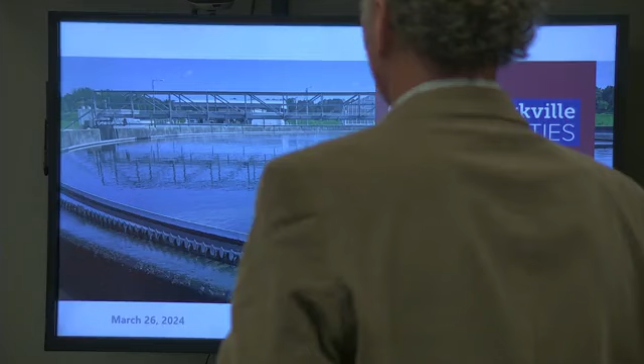That's kind of what today is about, to give the board a snapshot of where we are. And I think the next thing we want to talk about, not today but in the days ahead, is how do we actually implement these things? How do we pay for them? What is the sequence and timeline of doing that? And then how do we fund it?

That even gets back to part of our conversation in the works in the special call meeting, and we will be trying to pursue any and all types of funding sources available, either matches, grant matches, low interest loans, which will be on the next board agenda for Tuesday night, pursuing that. And then obviously the conversation too, probably sometime this summer or the fall.

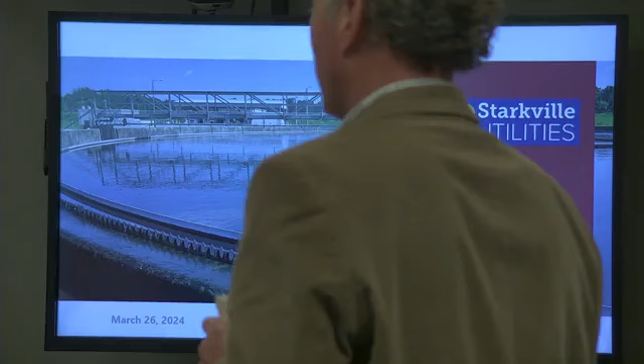But today is really kind of a snapshot of where we are, kind of where we need to be from a community standpoint, both currently and then also projecting out 20 years. That was kind of the focus of this evaluation, because we certainly do not want wastewater to be a limiting growth inhibitor for our community.

I'm pleased today to introduce to y'all Wes Cardwell. I know Wes has never presented before the board. Wes is the project lead for this, as well as the project lead for our aeration design. And then he's joined here by Mr. Matt Tabor, right over here. They both are in the wastewater division of Garver. We're really happy with the project we're working together. I'm going to turn it over to Wes and let him go through it.

But today is very much please stop along the way. We tried to distill this down into a very big document that you guys all have a copy of, into something that is just the pertinent information, but also giving you some understanding of what a wastewater treatment process looks like, so you can kind of understand some of the challenges.

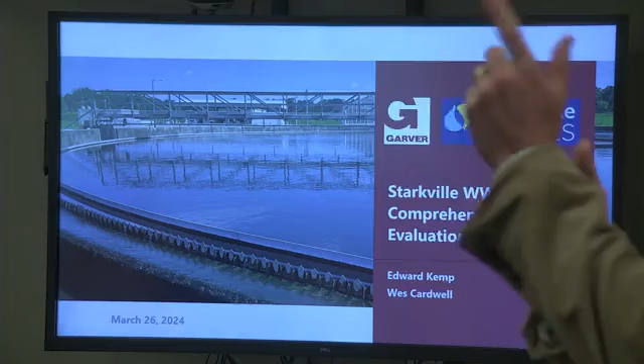So, Edward, before you go, would you refresh everyone's memory about who your team is here with us? I'm pleased to have several members of my team here. Mr. Thomas Ware, our chief wastewater operator, is the gentleman who keeps everything running on a day-to-day basis with staff, and some of the challenges you'll hear about today. He does a magnificent job keeping us within our permit compliance, and I just want to thank him.

And of course, Mr. John Scott, our assistant general manager. John is an electric guy by trade, but he is learning more and more about water and wastewater as he's been in our multi-service utility, and I'm glad that he's here.

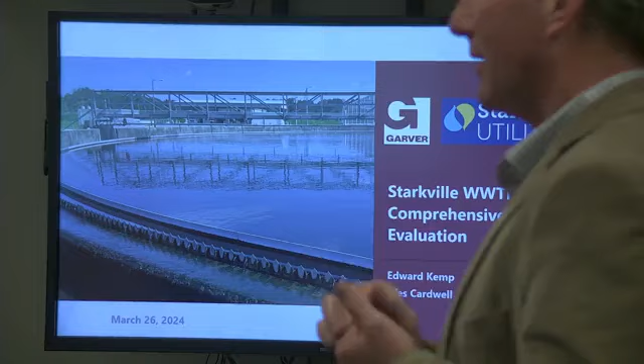Mary Williams is our capital project manager. Mary has been working on this project from the beginning, helping draft all the RFP documents all the way through. I call Mary the cat herder for this project, making sure we're staying on schedule and that everybody got comments in, and that we're progressing on the timeline we all agreed to. Mary's obviously going to be instrumental going forward in how we actually implement and build these projects and recommendations. And then Bailey Wofford is our system engineer for water and wastewater.

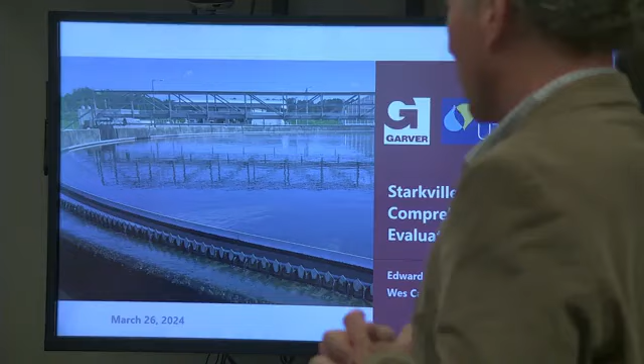And so we got a great team, and thankful for them and their work on this project. So thank you, Mayor. Thank you.

We'll turn it over to Wes. Thank you all, and good morning. First of all, thank you for the opportunity to share. I always love talking wastewater, and getting to tell a little bit about it is fascinating. When we do these comprehensive evaluations, it makes me very weird—I love it, it's just fun, because every plant has a story to tell, every utility has a story, every piece of infrastructure has a story to tell. So we appreciate the opportunity to learn y'all's story, and more importantly, to share that story with y'all this morning.

And what the plant holds as it sits today. So a little bit of background, just to refresh everybody's memory on the facility. The Ernest E. Jones Wastewater Treatment Plant has reliably served the city of Starkville and surrounding areas for over 45 years. And just like any other wastewater treatment facility, it's a lot of times out of sight, out of mind type infrastructure that we don't think about. Usually when you go there, they're not the best smelling facilities.

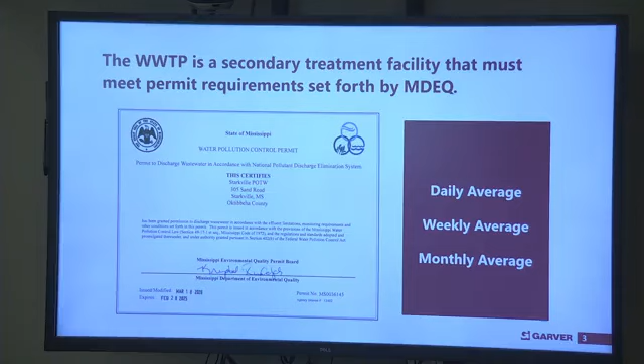It's important to understand the facility today and its capabilities to treat, but we don't want to be short-sighted and ignore what's coming down the road. We don't want to just stop short of equipping you today—it's always about that story tomorrow and the ability to do that tomorrow. So that was a key part of this evaluation.

Interestingly, since commissioning, the facility has met the needs of Starkville to support growth. Wastewater treatment is a core piece of that growth model. If you look at the population of Starkville since the facility came online in 1980, it was just a little over 16,000, and over the 45 years since—these numbers are probably a bit outdated—it's just shy of 25,000. That facility has been a backbone; it's supported that growth, it's gotten you to where you are today. That's important, just like all the pieces of our infrastructure are—if you don't have that piece of the puzzle, it's going to make life difficult.

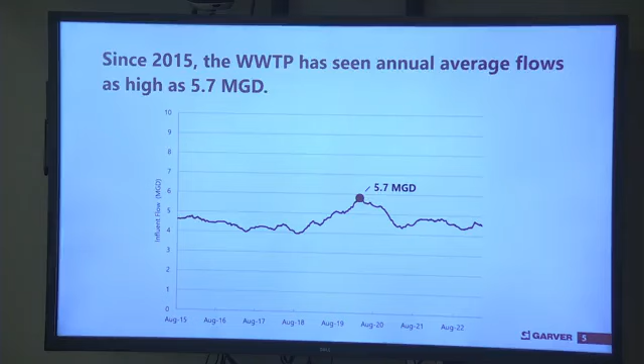Since 2015, just to paint a snapshot, the wastewater treatment plant has seen, annual average flows as high as 5.7 MGD. They spiked in 2019 and 2020—that was a very wet part of the five-year period that really pushed those numbers up and certainly strained the facility. But you can see a rolling average of somewhere around 4.7 to 4.8 MGD. That's important because the original design capacity of the plant, when it came online in 1980, was 5 MGD—that's what it was designed to treat. Now, we've learned a lot in wastewater since 1980, where we're able to push these facilities a bit more than they were designed for. But as it relates to the facility today, and the flows it sees, it's at its limit. They're doing everything they can to keep it going and keep the facility in compliance.

With anticipated growth, Starkville is going to continue to grow, and the plant's going to continue to be challenged to maintain permit compliance. Just some high-level projections from this effort: that roughly 4.5 to 4.75 MGD we've seen over the past 5 years, 20 years from now we'd expect that to be 6.5 to 7 MGD. That's simply the growth of Starkville and any additional connections the city and utility takes on.

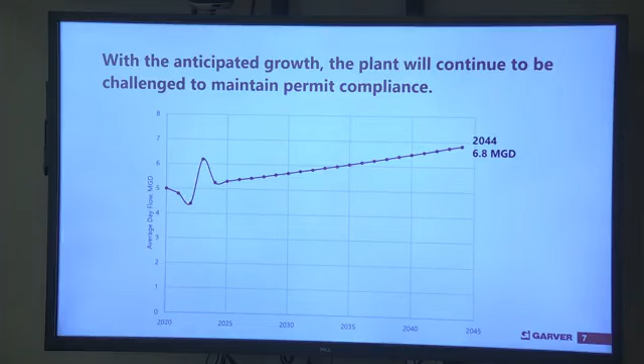So last year, in 2023, Starkville Utilities initiated a comprehensive evaluation of the facility. Evaluations can mean a lot of different things. Specifically for this facility, we were looking at capacity. We needed to understand what that number was, what this facility can treat. We needed to understand the condition of the assets there—are the key pieces of the plant in good condition, or should we be aware of them retiring very soon?

And then reliability. Reliability is a very important piece of anything to do with infrastructure, but certainly wastewater treatment. We need the facility to be reliable when it's pushed to its limits or when a piece of equipment goes down. How equipped is this facility to respond and ultimately maintain compliance with the permit, which is the number one charge, along with the safety of the personnel. I always like to view this as a three-pronged stool, because ultimately all of these contribute to plant performance and compliance.

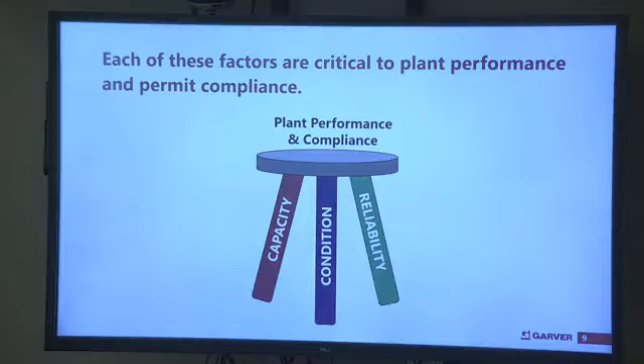So a few things we want to check off the list today: give you a background of the facility, talk about the results—I think that's of most interest to everybody in the room—what's the condition assessment results and what's the capacity assessment results. They're two different things we'll talk about. Some recommended improvements to address the findings from that assessment, and then some conclusions, path forward thoughts, and hopefully a lot of conversation and discussion.

As we go through this, please feel free to stop me. I'll be glad to go into any of the details related to the evaluation that may or may not be covered here. So please feel free to do that.

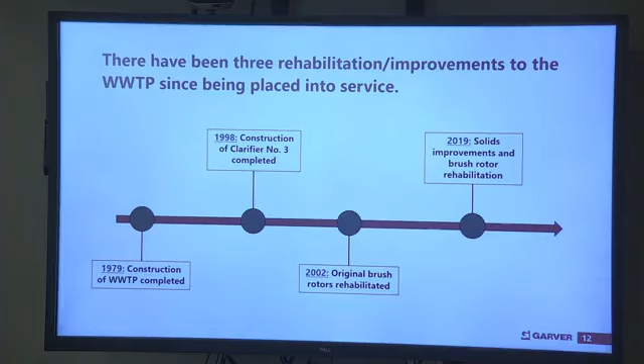So I mentioned before the facility came online in 1979, 1980, and by and large it's relatively untouched. In 1998, an additional clarifier was constructed that did not increase capacity, but gave Thomas and his team another tool to help with treatment, performance, and reliability. In 2002, the original brush rotors were rehabbed. And then, probably most of us are familiar, in 2019 the solids improvements project was completed, along with some upgrades to those brush rotors, which are a key focus today.

So when we're talking about wastewater treatment, I always try to start from here—not to go into the minutia of all the processes, but I want you to understand that wastewater treatment is a series of steps. We're slowly chipping away at the mountain, so to speak, to achieve permit compliance. These steps have to operate effectively to meet those permit limits. So if step A is not operating well, or it's sacrificing its ability to treat, steps B, C, D, and E are going to suffer. The further upstream you go in a facility, the poorer that performance, and it's going to snowball as it works its way through. So we have to understand that when we talk about each of the various processes, because they're all designed and aimed to do one specific thing that ultimately contributes to permit compliance.

So just to walk you through the flow path here at the plant: there's an influent pump station to the northeast. If you're familiar with this area, there's a very large EQ pond up there. All of the wastewater in Starkville goes to a pump station right there, which pumps it into our very first treatment step. You see in the red box, that's our headworks facility.

We're trying to remove any debris, trash, rags, or small grit particles that may affect equipment downstream. That's what we're trying to achieve in that process.

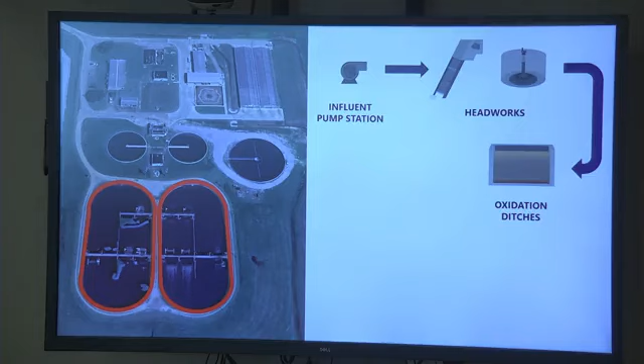From there, it goes to our oxidation ditches. Wastewater treatment is a biological process. We rely on biology. It's really cool if you get into the weeds of it to see what these microorganisms are doing and how it leads to compliance and treatment. It's not magic, but it kind of looks that way under a microscope. That's an active biological environment in our oxidation ditches contributing to treatment, removing a lot of the organics and ammonia we're trying to remove.

From there, we go to our secondary clarifiers, and ultimately we're trying to settle out all of those bugs in the bottom and create a clear layer on top, and that clear layer is what flows downstream. We'll talk about the bugs in just a second.

From that, we still have to disinfect it. Secondary treatment standards, when the Clean Water Act came along, one key initiative was disinfection - removing pathogens, those disease-causing organisms that our biological systems treat but don't get down to levels that protect public health. So here at this facility, chlorine gas is used to inactivate and oxidize those pathogens. Then we re-aerate it, adding oxygen back to the water so the fish are happy downstream.

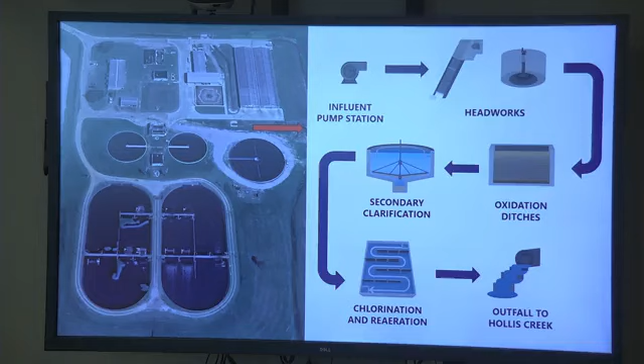We discharge it ultimately into Hollis Creek, which is just to the immediate right on this aerial photograph.

I mentioned the bugs. We do produce biology as part of this process, and because we're producing biology, at times we get more than we need, so we have to waste solids as part of this. From our secondary clarifiers, we have a sludge holding tank, one of the new facilities you have there. We dewater those solids so we can ultimately dispose of that.

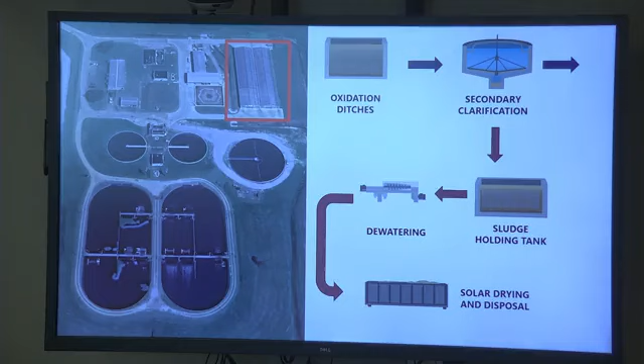At this facility, you have solar drying to achieve a certain quality biosolid that enables more disposal options - it's a very nice thing to have. But ultimately, that is how we get the solids out of the facility. So a lot of different pieces of the puzzle coming together, but each very important to that mission we talked about.

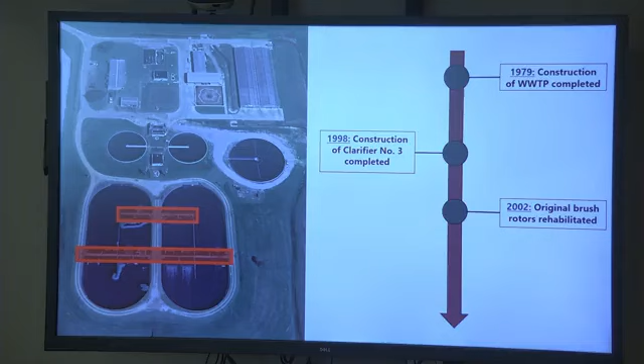In 1998, clarifier number 3, highlighted in yellow, was constructed. In 2002, we addressed some of the equipment in the ditches - you can see that highlighted in red. And then in 2019, everything in the upper right we addressed, as well as going back and revisiting the condition and replacing the rotors in the ditches as part of that effort.

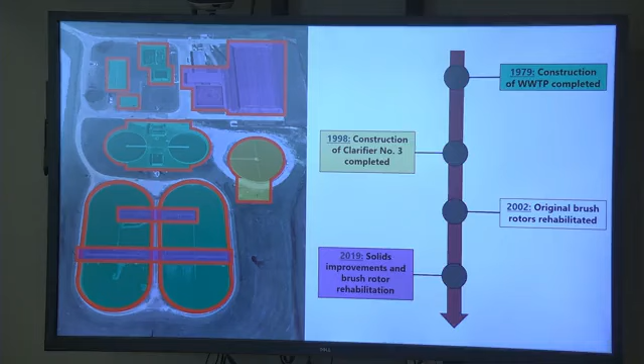If we put everything together, you can get a feel for a lot of the major components. The major pieces of the puzzle are in green in this image, meaning they're that 45-year-old asset working well and reliably, contributing to treatment. But these things have a finite life that we'll talk about - it's important to understand that so you're not caught off guard or surprised should it go down.

As part of this evaluation, we assess the major equipment for each unit process, each of those steps along the way, from two different angles. The first is to understand the condition - what's the state of this pump or this basin - and then to understand the capacity. I want to break both of these down further as we go through these next few slides, but we'll start with this piece.

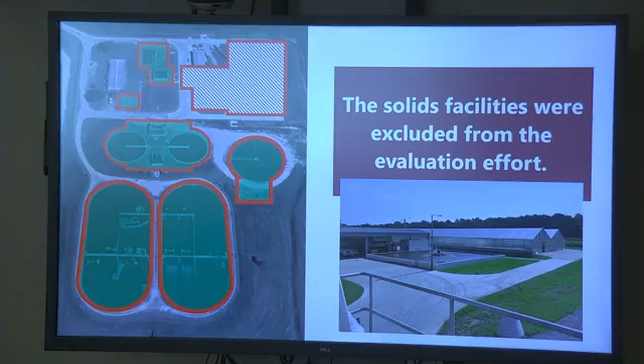Before that though, we did exclude the solids facilities from the evaluation effort. Again, those were most recently placed online in 2019, and those facilities are working well for Thomas and his staff. So to really pinpoint and get a laser focus on the facilities that needed it, those were excluded from the effort. But that doesn't diminish their importance to what this facility does - it's an extremely important piece, just not part of the evaluation assessment that we did.

So condition - when we look at wastewater treatment facilities and treatment facilities at large, we really want to understand the condition of an asset from three different angles.

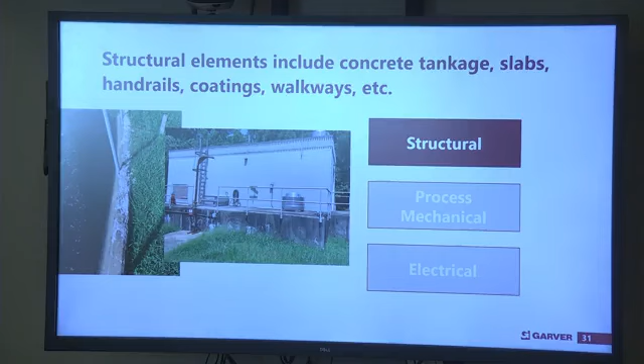One, the structural elements of it. What does the concrete look like? How are the handrails, the condition of those, so that our workers and our staff have a safe environment to work in? Any protective coating systems, the walkways, anything that you think is structural, we look at it from a structural perspective. And those are important to understand as a part of a facility.

Process mechanical, this is the pumps, this is the valves, this is the pipes, this is the working equipment, understanding the condition of those assets as it relates to their condition.

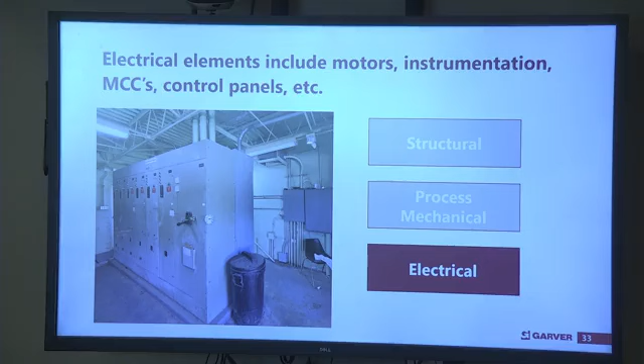And then lastly, we can't forget electrical. Electrical is really the bones behind the scenes that's powering these facilities. And really we talk about reliability and worker safety. This is a very important aspect that we have to consider because this is dangerous stuff. It's not just that little socket in the wall that you may get a little shock from. This is serious power that can cause death if these aren't in good shape. So we have to understand that as well.

When we do these though, I always try to set the stage. I try to have conversations with each of the various utilities that we do this at, because condition assessments, just by their very nature, are subjective, right? You're asking somebody to come in to look at a piece of equipment and tell you how well it is or how poor it is. That's extremely subjective. I'm not dismissing that, I'm cognizant of that. And they're sometimes difficult to translate into actionable plans. And there's reasons for that, because we all have a bias when we're looking at pieces of equipment.

So I always try to, when I visit with my team, when I visit with utilities, set the stage on four principles that I have that we have to keep in mind.

Just because it's old doesn't mean it's bad. Doesn't mean it's bad at all. But just because it's new doesn't mean it's good either, right? We have to look at each piece as it stands today, but understand that if that pump is 30 years old and it's been working pretty well, it doesn't mean it's going to crap out tomorrow. It shouldn't catch us off guard though, so we may need some spare parts on site, but let it run, it's serving well. On the flip side, that new pump, they could have flipped the switch yesterday on it and it didn't run at all, but it sure looks bright and shiny. We have to avoid that when we're asking questions, when we're working with staff to understand that.

Priority improvements don't always mean large expenses or efforts. A lot of times you'll find through these efforts that sort of low-hanging fruit, right? There may be that one valve that if it failed, the plant would just crumble to pieces. We would lose compliance with our permit. It doesn't always mean a large or significant investment. So take those goggles off and approach every facility with that in mind.

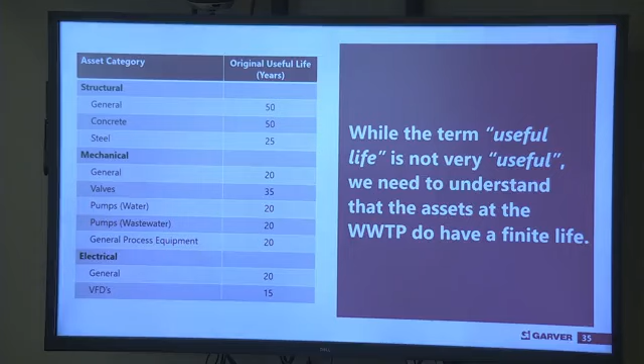So when we were assessing this, we did use a tool. The Water Environment Research Foundation is an industry kind of standard in a lot of aspects as it relates to wastewater. Asset management and condition assessments are a very important component of their research and what they try to do. They actually provide what they call a simple tool, and it's an acronym - I would stumble over myself if I tried to tell you what it meant. It's just simple to use, that's kind of where they get to. It's actually an Excel spreadsheet that's free.

You can apply this not just to a wastewater treatment plant, you can apply it to any asset that you have throughout your utility, throughout your city. Because ultimately what it's trying to do is tell us two very important variables. The likelihood of failure - think of this in terms of, when I say asset, think of a pump, think of a valve, a specific component to the plant, not just the plant in general, but we're dialing it down to a pretty granular level here. How vulnerable or how likely is that asset to fail? We need to understand that.

But if it does fail, what does that mean for the facility? How serious will that be? If it goes down and it's a minimal disruption, it's not as big of a risk as that small valve that may lead to catastrophe at the plant. So we're trying to tie those two pieces together and ultimately produce some useful data. The goal here is to try to take out that bias, to take out that subjectivity, and give you a formal ranking system, a scoring system that's transparent, that everybody can see. We're not trying to do this behind the curtain - we want everybody to see how we arrive at the ultimate conclusions that we have.

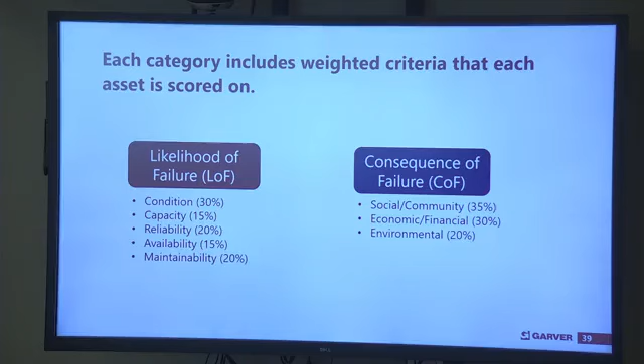All that I wanted you to see and take away here is each of those criteria are scored on a scale of 1 to 5, 1 being the best it could be, 5 being the worst it could be. And we try to define that for everybody doing the evaluation so that we're all viewing it similarly. We're applying the criteria as consistently as possible, because what I may think is a 4, Matt may think is a 2, because we haven't set these definitions of what we're trying to look at.

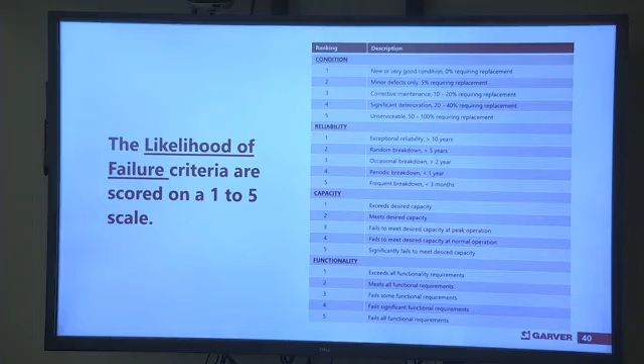So this applies consistency across the board, and just like we do it for likelihood of failure, we also do it for consequence of failure. Same concept there.

So what do we do with that? Knowing these factors across the plant ultimately allows us to plan properly and apply some decision-making guidelines as to how we decide. We've got this large plant here, we've got 50 different assets. Where do I start? What's the most important versus what's the least important that I have to worry about? So we're trying to tie these two variables together.

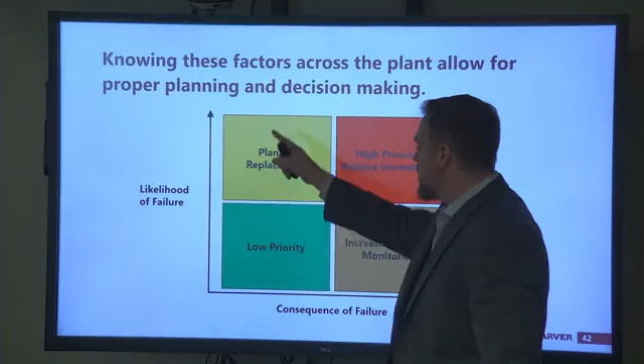But we want to tie the likelihood of failure to that as well. Just because if this fails, our plant falls into the pit of the earth is bad, but if it's not likely to occur, it doesn't need to be on our radar as high. It's not a high priority to replace immediately.

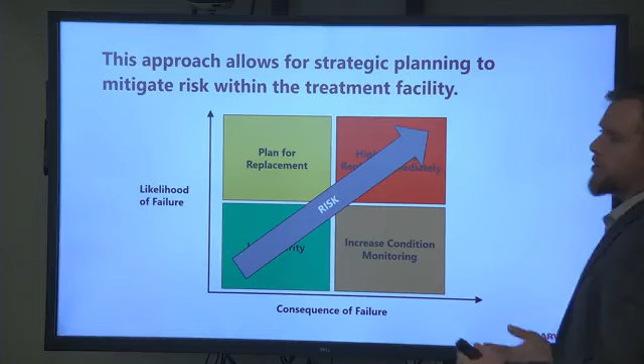So we're trying to tie those numbers together, because ultimately what this graph, what this tool will tell us is our risk profile through the facility. Now, it's our job as administrators, engineers, operators or maintenance technicians to balance that risk. Risk is a bad thing in a facility - doesn't mean you can get rid of it. It's always going to be there, but we want to mitigate it as best as we can and have a plan to tackle that should something go bad.

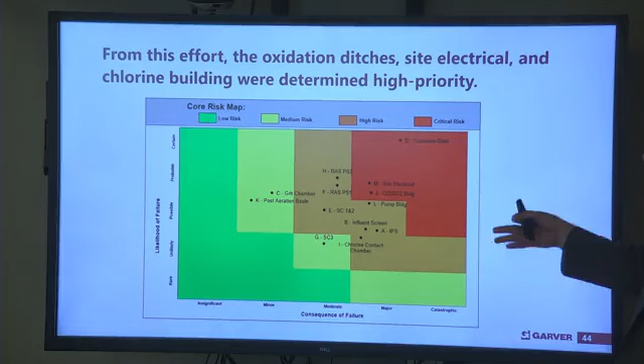Orange is a high risk, but not as serious or significant. Yellow is that medium risk - you need to keep an eye on it, be aware of it, but it's not the end of the world if you have processes or assets in the yellow. And green's good - good in everything, good in this as well. That means it's in good shape, good condition, it's reliable. It may have a high consequence of failure if it does go down, but the likelihood of that may be very low, very unlikely.

So from that, the oxidation ditches, which I don't think should surprise much in this room if you know a lot of the history there, is extremely concerning. It's very critical - that's why you're doing the project that you're doing now, and investing in that piece of infrastructure at the plant. Just as important, though, is the site electrical. Most of that electrical infrastructure is 45 years old. There's been some repairs, there's been - I won't say improvements, but just over time, things deteriorate, particularly in electrical facilities.

Wastewater treatment plants have a lot of places with high hydrogen sulfide. There's corrosive conditions, and electrical stuff is very susceptible to that. So the more that deteriorates, that's a very big safety risk for our staff. I mentioned before, we're talking about serious power at most of these processes.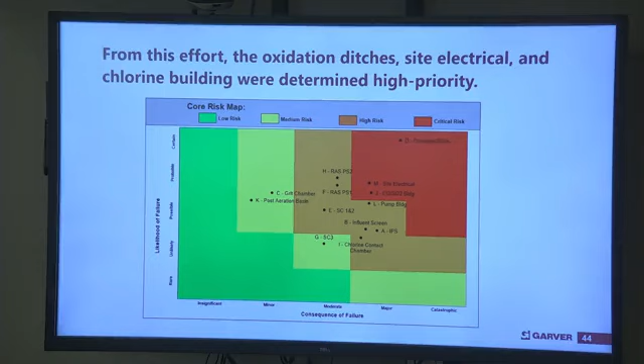So even though that's up on the red, a simple alarm to alert staff that there's a leak would mitigate that. It would shuffle things back down to the left. And that's actually part of the project we're focusing on right now - applying that low-hanging fruit I've talked about before.

If you want to see where that shakes out on the site plan we talked about before, you can see the oxidation ditches at the bottom of this image. The chlorine and sulfur dioxide facility is right next to the bottom part of our admin building, which is, again, concerning - if we don't know there's a leak, there's a break room right here in that same building. It's very important that we know that. And then you can see a lot of the electrical infrastructure starts here, but it does exist throughout the plant.

Any questions on the condition piece? I apologize if I'm going too quick on that, but I can break it down further if you need me to before we transition to capacity.

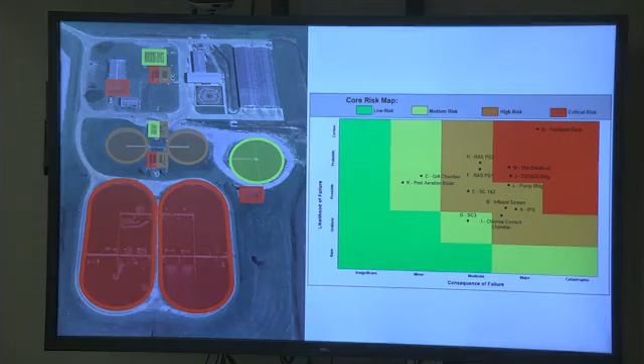So knowing that piece, knowing condition, is important when we're trying to identify where we start in our plant. But we've got to focus on capacity too, right? The facility has to be equipped to treat the flows that come from it. So when we say capacity of a wastewater treatment plant or the capacity of a process, we've got engineers - there's two different meanings to the same word. When we say capacity, we mean treatment capacity, which means how much flow can I push through this process and still meet the performance I'm trying to get out of it? How much can I stress it and still achieve the goals, the permit limits, or just the removal performance this facility is designed for?

A lot of times, most times, that's based on experience, that's based on expertise - that's subjective though, and I'm trying to take this piece out of the evaluation. So for what we did when defining capacity for the wastewater treatment plant, we relied on industry-accepted guidelines: Ten States Standards, manuals of practice - generally accepted as good, reliable criteria.

MDEQ has the same language when engineers design upgrades - they basically say use industry-accepted criteria such as manuals of practice, such as Ten States Standards. If you deviate from that, they'll consider it, but you have to submit that in writing and let them take it into evaluation. But for today, when we were assessing capacity, we wanted to take that subjectivity out, and we relied on those two standards to define capacity as we go through this.

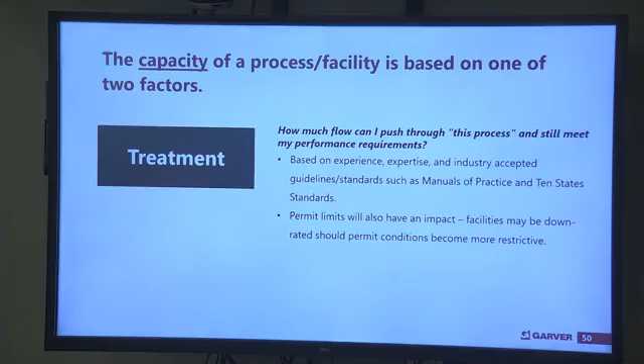Hydraulic capacity is totally different. Basically, this is how much flow can I push through the plant, from process to process, without spilling out of the tanks and running on the ground. I don't care if I hit a performance goal, I don't care if I hit a permit limit - I just care that it doesn't spill out on the ground and become an issue. So that is our hydraulic capacity, and that's dictated just by the physical characteristics of a facility.

So we look at pump capacity, we look at pipe size, and what that pipe network looks like as it goes from tank to tank. We look at gates, valve position, weirs - all of the things that control the water level through the plant. We have to understand that because that ultimately contributes to the hydraulic capacity.

And we always start at the end of the plant and work upstream. So we don't actually start at the last process - we look at our discharge point. Where Hollis Creek and the wastewater plant meet, we want to know what that water level is there and work our way back. Why that's important is, generally speaking, that stream during dry weather, middle of summer, is going to be low. That's good to know, but what's better to know is during a 100-year flood event, when that stream gets high, can I still push the flow through my facility, or am I going to be in trouble?

From a regulatory perspective, and really industry-accepted guidelines, a 100-year flood event is typically the target when we're talking about risk. We may want to know what happens at 500 years, but 100 years is always available through FEMA - the flood insurance rate maps is where we go for that information. Over time that may change - if there's downstream development that has restricted that river or water body, it's just changed. FEMA updates those maps, maybe every few years depending on the place. So over time, if there was no development 40 years ago but all of a sudden a community is built around there, there's a chance that receiving body has changed, and we have to take that into account when we look at our facility.

So sometimes when we talk about capacity, trying to avoid just throwing out all the terms that may come up, we have to be cognizant of the fact - and what I want the takeaway to be today - our flow conditions at the plant are continuously changing. There's no 'hey, it's a 5 MGD plant, so we see 5 MGD all the time.' That would be great, Thomas would absolutely love it - he'd jump up and down if he just saw one steady number day in and day out. But unfortunately that's not the case. So if we think about it over the course of the day, our flow is just continuously changing.

Generally speaking, 6 a.m. to 8 a.m. when everybody wakes up, we may be a little bit higher. Middle of the night - every place is different, but maybe 11 p.m. to 4 a.m. - everybody's asleep, no one's taking a shower, no one's doing the dishes. College town, maybe those numbers are a little different, but for sake of this conversation - then everybody wakes up, or it's the middle of the day, or maybe it's a football game and halftime happens, we're going to see a peak event. And that's really what we're interested in - what's that instantaneous peak flow during the day that I have to account for.

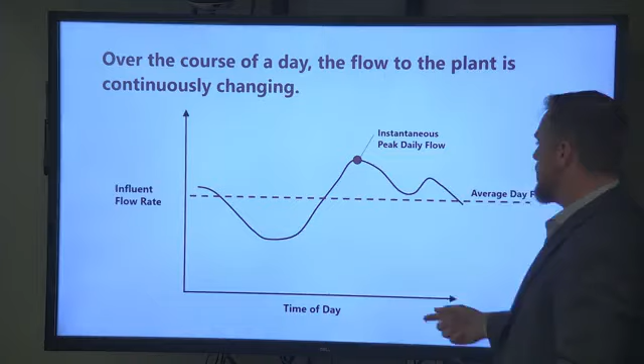Now, a lot of times when we're talking, we don't throw out, hey, your peak daily flow is this, or your min flow is this. We generally talk about on an average day basis. So if I take a 24-hour average of the lows and the highs, I'm going to come up with a number. I want everyone to understand, I want to say the plant averaged 4.8 MGD per day, but just think, during that day, it was higher than 4.8 for a while, and it was lower than 4.8 for a while. So they're continuously changing.

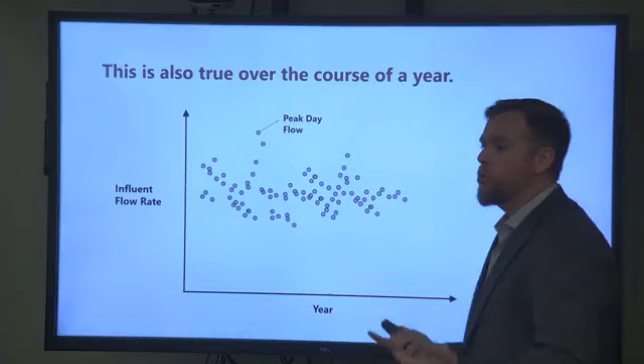It's also true over the course of the year, right? The spring showers come, or the dead of summer when it's extremely dry. And we like to plot that because it tells us a few different things. Each of these numbers represents that 24-hour average I've talked about before, and our time scale on the bottom is years. So each day I'm dropping a dot from my average daily flow, and right now it looks like a bunch of dots on a white screen. It doesn't really tell you much, other than over the course of the year, how high did my flow get? That's an extremely important variable for us to know as designers, as operators, as users of the system.

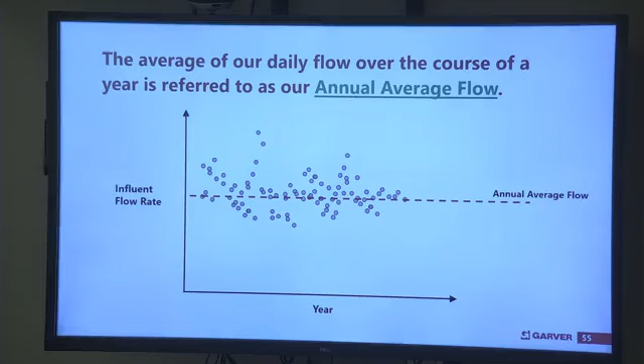We can take an annual average flow. That's basically a sum of all of the daily flows and averaging that out. That's going to tell us a 365-day, or annual, average. We'll talk about annual averages in some following slides, so please keep that in the back of your mind. One of the things we also do, and this one maybe not as intuitive, is we want to take a rolling 30-day average of each of those dots.

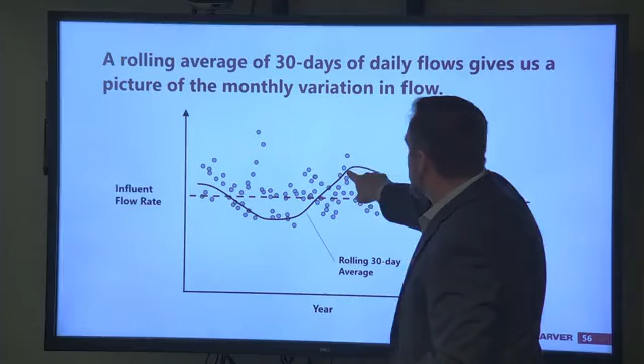And the reason we do that is most of our permits are written on a monthly average. So it's not that Thomas has to treat for this number on a daily average. What MDEQ is concerned about is during that month, that 30-day period, what was your average? Because that's what we want to know ultimately went to the stream or the creek. So we'll plot a rolling 30-day average, and generally we'll see a low, but we'll also see a high. And that high is what we call the maximum month.

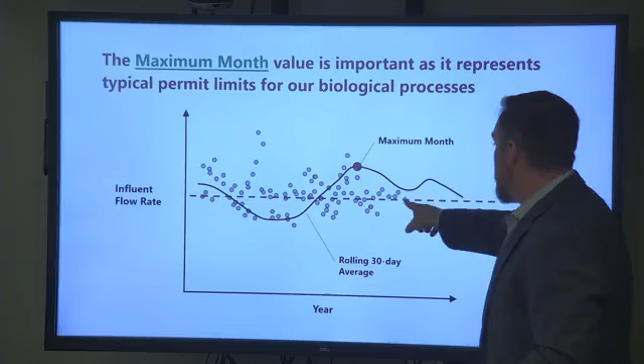And when we design our biological treatment systems or a lot of the processes at the plant, that maximum month number is extremely important, because what that number tells me is there is one month out of the year that this facility is going to see that flow over 30 days, and my process better be able to treat it. If I design for that annual average, there's a gap, right? That may put me at risk of violating. It doesn't necessarily mean that you will, but if you design for the annual average, you're short-sighting yourself and you may be in trouble. So we have to look at it through that lens as well.

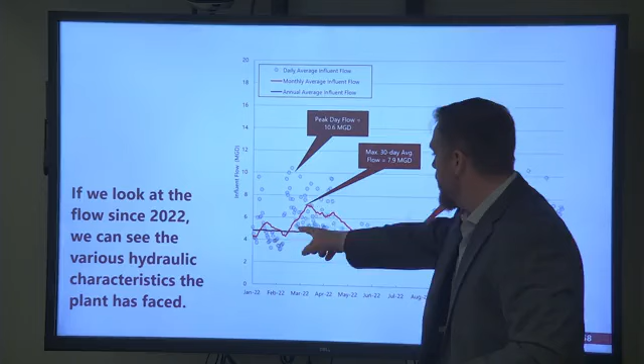So if we look at the wastewater treatment plant, if we tie all of that together, this is flow data since 2022. Each of those dots represent a 24-hour average. This line in the middle is our annual average. So you can see over the past 2 years, the plant's generally been at about 4.8 MGD. Over that period, we had a 30-day peak of about 7.9 MGD, so you can see the scale and magnitude of that. If I designed for 4.8, I would be in a lot of trouble if I saw 7.9. But we also saw a peak over that period of 10.6 MGD.

And so hopefully the takeaway is, we're going to talk numbers, we're going to talk capacity, but we try to take all of this into account. I want to tell you one number, but just know behind the scenes there's a lot that went into that number to make sure it was a safe planning criteria that we're comfortable operating the facility to ultimately hit our permit requirements.

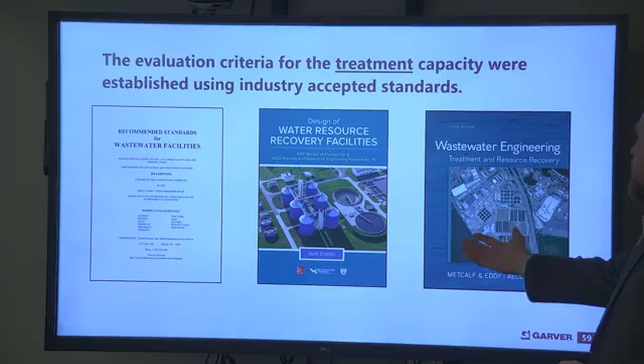I mentioned the criteria before, just to reiterate. The evaluation criteria were established using industry accepted standards. This is generally what they look like: 10 State Standards, the WEF Manual of Practice for Design, and Metcalf and Eddy. Each of these generally agree, it's not like one says one number and another is totally different. There's only so much you can say about how to design a wastewater treatment plant.

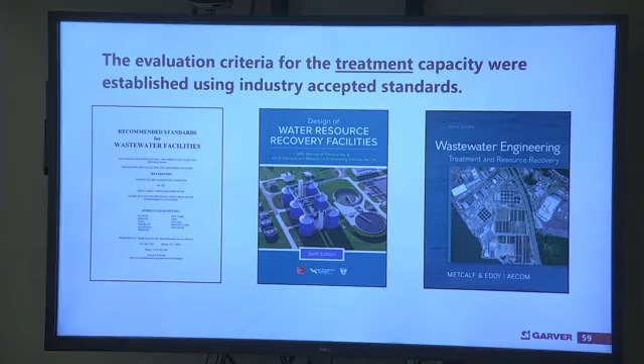What's important is, as these are updated, the most recent edition of 10 State Standards was 2014, and Metcalf and Eddy is on its 5th edition, which came out around 2020-2021. So as we learn more about the industry and about processes, and how much we can push them, I want to be sure I'm evaluating this from the right perspective and giving you the most useful, applicable data that I can.

So what do the numbers look like at the plant? First of all, each process is different. As nice as it would be for all the numbers to fall in a straight line, that's not necessarily the case. But with this criteria in mind, and looking at the loadings the plant has seen - how much BOD, how much ammonia, how much TSS comes down the pipe that Thomas has to treat for - the oxidation ditches are the capacity limiting process.

And that's the ditches as they stand today. If you drove down to the plant, you saw the temporary aerators in service. Generally we'd feel comfortable that facility, that process, could treat 4.2 MGD. Your process limiting number is the capacity of the plant. We may be able to push more through headworks and grit removal, but this is going to be our bottleneck, our pinch point. So 4.2 MGD is generally what we concluded is the capacity of those oxidation ditches right now.

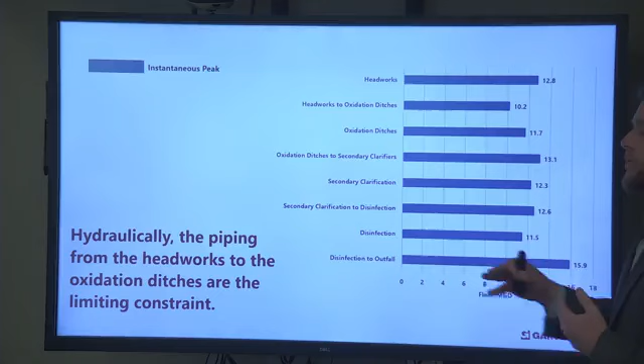That was on the treatment side of things. If we look from a hydraulic perspective, let's take performance out of the window. We don't care about performance, but we do want to check - just because a number may be high that it can treat for, if I can't physically push the water through, I don't need to have that, right? So we have to look at both.

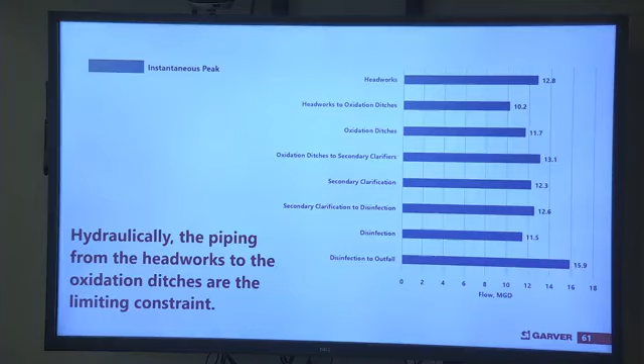By and large, each of the processes at the plant are more than adequate, more than capable of handling the flow that comes to it. There's not necessarily a concern there, which isn't surprising - most of the time these are always higher numbers than the treatment capabilities. We want it to be that way; honestly, that's how we design it. But sometimes things change. There may be some shortcomings at some facilities, or replacements that happened over time that may drive some of these numbers down.

But for takeaway today, there were really only two processes we were limited by hydraulics. So this is combining both of those numbers - you can see in purple our hydraulic constraint. Hydraulically, we're limited at these processes, and the rest are all based on treatment capacity, our ability to meet our performance goals. Out of that, it doesn't change the conclusion that the oxidation ditches continue to be the limiting process at the plant at 4.2 MGD.

So when I combine the past data I showed you for the past two years, you had a peak flow of 10.6 MGD that the plant had to treat for. On an average day basis, you saw 4.86 MGD - that's what you had to treat for on an average day basis. And you can see that there's quite a few gaps, and that's ultimately what we're trying to figure out here.

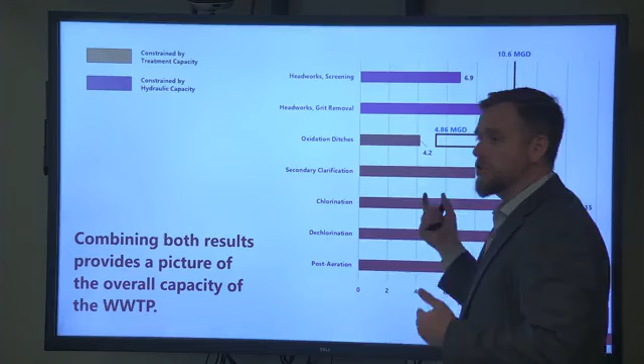That doesn't mean the plant busted permit particularly on that day or over that period - that might have happened in the middle of summer where treatment's a little easier than it may be in winter. But the gaps are risk. The gaps are concerning because there's the potential that if that facility saw that flow, under the circumstances, it could bust permit. And things do line up if we look at past data that support those conclusions.

So taking all of that information together, we got results of the condition, right? We know what's good, what's bad, what's at risk of failure and what that failure may mean. We also know the capacity - we know where our gaps are, what's equipped to treat at the plant, and what's not. We've got to marry those together, and the goal, working with Edward, Mary, and Thomas, is how do we start tackling the improvements that are necessary at the plant.

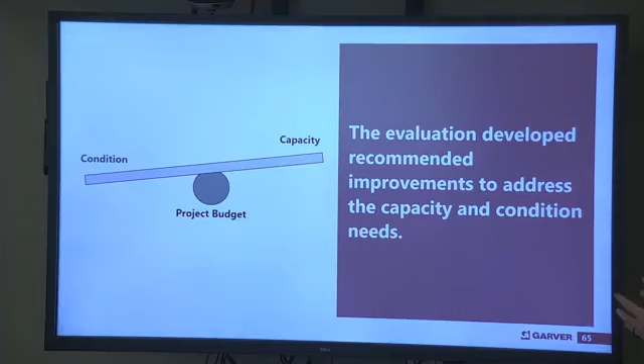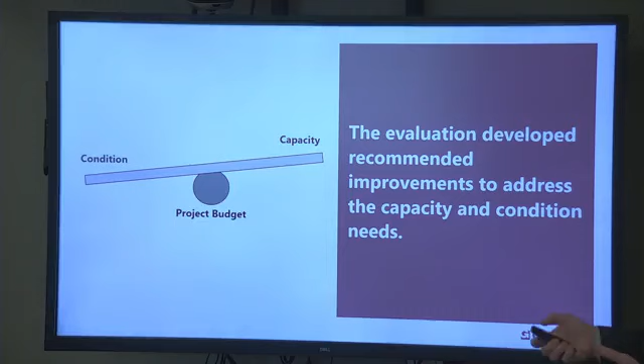So trying to do all of that in a strategic way, the easy thing would be to lump it all together and say you need one project for this. Well, that's not financially reasonable, and I understand that. So trying to chip away at that, what we came up with is what we're calling project packages.

There were 6 project packages that the report is going to recommend to address the issues of the plant. We're going to walk through what each of those are, and more importantly, what each will do as it relates to the condition results and to the capacity.

So package A, Edward mentioned at the beginning, is currently under design. It's going to address the oxidation ditches, which is a capacity issue, but it's also going to address the critical condition of the site electrical and the disinfection. In other words, we're going to tackle the projects that are critical risk, in the red, first. That's what we are designing for today.

So coming out of package A, you can see that we're sitting pretty good. I don't have anything in the red now. That's the goal and the intent of that project. So I'm addressing the condition here, but I'm also improving my capacity.

If you'll recall, I showed you this graph before that showed the ditches were at a capacity of 4.2 MGD. There was a gap there because I've seen flows higher than that over the past couple of years. With these improvements, we'll be able to feel comfortable that those oxidation ditches can treat up to 5.8 MGD. So now I've got overlap with what my plant has seen over the past few years, and I've got capacity to treat what's coming in.

So that's the first step. It doesn't address some of the other gaps, and we'll talk about that in subsequent projects, but in terms of immediate need, we're tackling the most critical processes first. While there is a gap here, I could live with it not achieving its performance goal. If the headworks isn't operating under ideal circumstances but it's still pushing the flow downstream, I can live with that. Permit compliance is ultimately what that shapes back to, and that's very important when we're prioritizing how we address capacity.

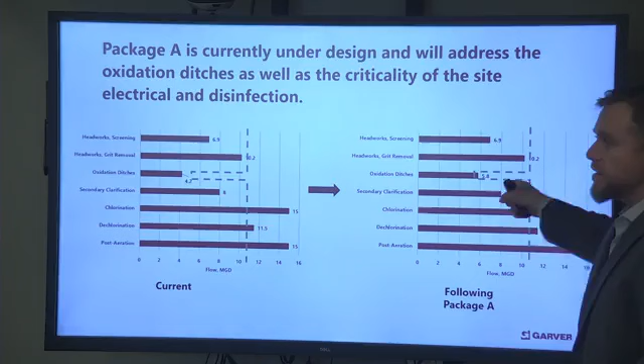It's not a function of money. A lot of it's just the characteristics of those basins themselves. Basically what we're going to be doing in this project is replacing those failing aerators—you have 3 per oxidation ditch, so a total of 6. We're replacing those with newer units, the most efficient that we can get. They just have a certain capacity tied to them, and once we replace those and get them into service, that's how we're going to achieve that 5.8. It's trying to balance what's financially prudent in terms of improvements to the oxidation ditches themselves versus getting capacity online very quickly so that we don't have those issues.

The oxidation ditches, those are like big concrete lagoons, right? That's in a way kind of like Beverly Hillbillies' cement pond. Yes, sir, that's what those are—holding places where you do aeration. What the rotors, the aerators, are doing is transferring oxygen into the ditch itself. I mentioned before that it's a biological system.

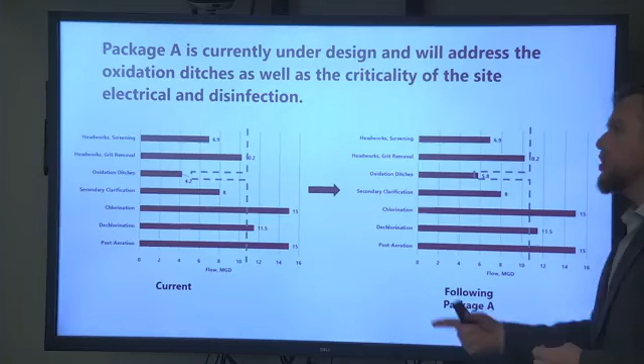Just like us in this room, they need oxygen and they need food, just like all of us here. Well, these mechanical devices are what's transferring that oxygen from the atmosphere into that basin. And there's just a certain limit, a ceiling that a certain diameter disc at a certain depth can do. That's all that the manufacturer is comfortable with, and test data shows that it can handle.

The oxygenation helps the bugs to clean, keeps them going, keeps them happy. That's what the process keeps them hungry for - it's kind of the fuel for them doing their job.

Alderman Beatty, I think the other question you're asking is how does the oxidation ditch set us up for that 20-year study period. I think what this does is it gets us in a better situation in the short to medium term. But as you'll see in a later package, as that growth number continues to go up from the university, the city, the surrounding areas, there will be a need for additional oxidation in the future - an additional ditch - and that is one of the later third packages.

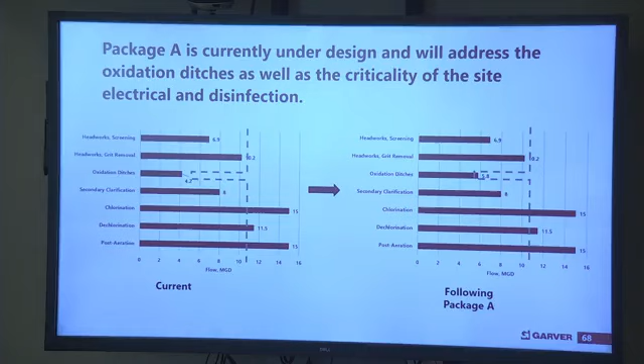That's probably 15 years down the road, but that was contemplated in the study as well.

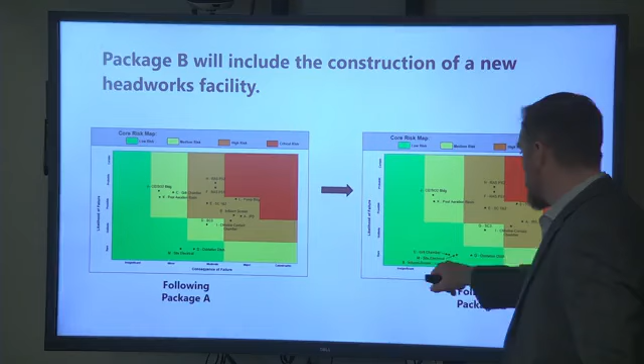Package B - the focus of Package B is our headworks facility. These facilities were more capacity constrained, but they do have some concerns on condition. The influent screen is right here, the grit chamber is yellow, but it's still kind of high on the likelihood of failure. Following these improvements, we're comfortably in the green, both with the screen and the grit chamber. So we're really addressing the condition of those processes as part of this package.

We're also greatly increasing the treatment capacity. You can see the gaps here in the current flow. Following these improvements - and here's where that future flow line comes into play - we're not going to design something just for today, we absolutely want to tackle what's coming down the road. With these improvements, we're not talking about a facility double the size of what it has to be for today. It just may be, hey, instead of this channel being 4 feet, let's make it 6 feet wide - simple things like that. We can greatly increase our treatment capacity, slowly filling in the gaps as we go.

As Edward was alluding to, these numbers represent the 2044 flow conditions that we expect to see at the plant. That was based on population growth data for the city, as well as a 20-year projection the university provided of what they expect their enrollment to be.

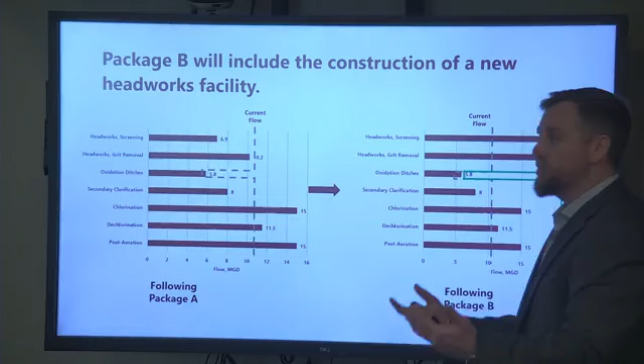Sometimes flow projections are like looking into a crystal ball - how clear is that crystal ball? It's about as clear as we could make it, but a final recommendation as we go forward is to track that growth and see how it aligns to this data. This document is intended to be living and breathing, so we need to make sure the assumptions put into it hold up, and we're not totally missing something.

Package B is a little over $6 million. Again, it's a new headworks facility that addresses condition, addresses capacity, and provides redundancy, which contributes to ultimately treatment reliability. It's a very important piece of our treatment puzzle.

Just for the board's edification, at the last board meeting we applied for our wastewater STAG grant, and the applications are due today. This will be the project submitted for that particular grant - Package B, Headworks.

Timeline on Package B - what do we expect? Again, we expect to bid by the end of the summer.

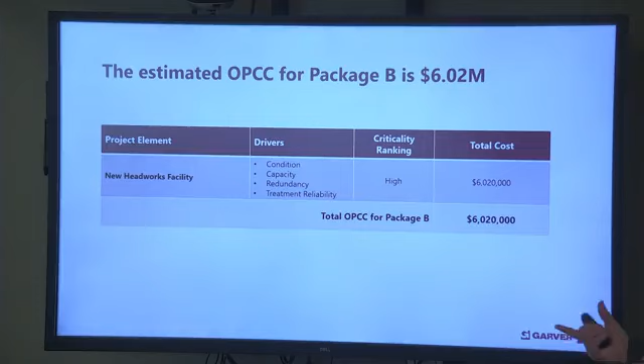We expect to be under construction for a majority of next year. There's a long lead time, probably 30 to 40 weeks just from the day you order the equipment before it gets on site. So we expect by the end of next year that equipment to be installed and slowly coming out. I say slowly, we're going to be pushing, not just standing by on the sidelines. We're fast tracking design to get it through, and we're going to be pushing the contractor to get it through as quick as we can. But generally speaking, we expect it to come online towards the end of 2025.

Mr. Kemp, is Mississippi State aware, I'm sure y'all are in consultation with them on what their prorated share of the capital cost will be on this? Well, they were part of our initial kickoff. We kept them abreast of the project. They've been provided a draft of the report as well, understanding that they are a partner in this plan together. So yes, they are aware that we're going through this exercise and that there will be some recommendations for improvements.

Do we determine their prorated share on a rolling average basis, or is it set in the contract that it was supposed to be a certain amount they would pay for capital projects? What would be the percentage of their cost share in this? If this is a grant and we have a 20% or 30% cost share, or do we have to bear all of what's there?

So we look at a calendar year snapshot when we calculate flows. We have flow monitoring devices at the inflow pump station, that's all the flows coming into the plant. Then there are subsequent flow measuring devices around the campus that calculate the amount they're actually sending to us, and we compare that with the total flow. So over time you calculate what that percentage is. I think last year's percentage was in the 25 to 30% range, if I'm not mistaken, but I can get you that number. They pay that percentage based on flow for all our operation, maintenance, and capital.

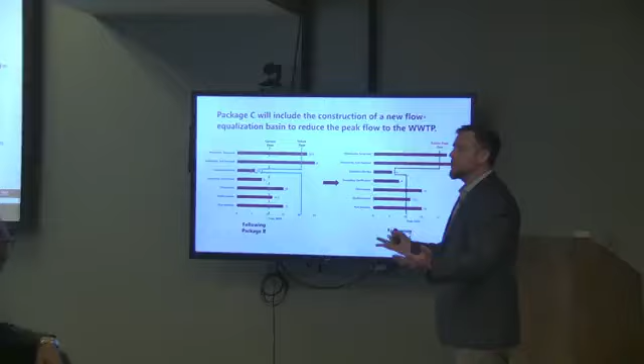Now, the headworks is still a very important piece. We want all of our flow to go through the headworks before it goes to our equalization basin. If we don't, that creates trash and debris that staff have to get out of there with a fire hose or whatever the needs may be. So we still want to process it prior to that basin, but once it goes in that basin, it's a big holding pond—I think in this case about 3 million gallons.

Don't quote me on that. It's a very significant capacity, but it does provide us a lot of flexibility, not just for that flow condition. It certainly helps out with current conditions as well.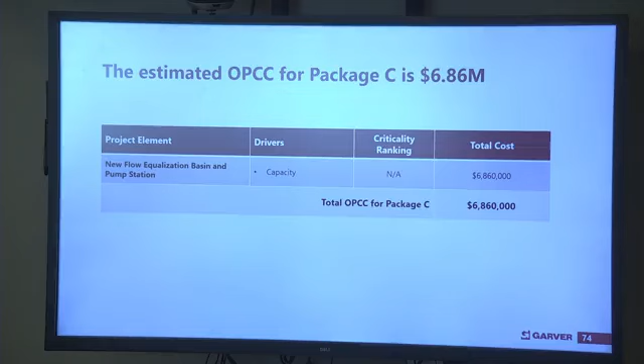That package is $6.86 million for that particular project.

Package D, just a couple more as we go through this.

We do still need to address some of our secondary treatment processes. You'll notice we still have quite a few here hovering in the orange. Because we don't necessarily know the timeline for that project, there's a likelihood some of these may be in the red at that time if they continue operation. So really the point of Package D is to start addressing some of those elements, so that following Package D, for the most part, we're able to get most of our assets into the green or yellow, which is basically restoring that condition and getting them into a good, reliable, operable state.

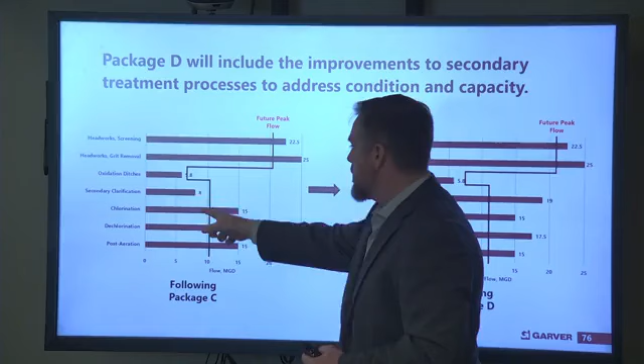The other big thing this package includes is our secondary clarifiers, which are a very, very important process at the plant. You'll notice that even with that peak flow basin, we still have a gap that we're not filling. That's of concern—it's something we do want to fill. We don't want to live with that. With this project, making the improvements, we'll be able to far exceed that.

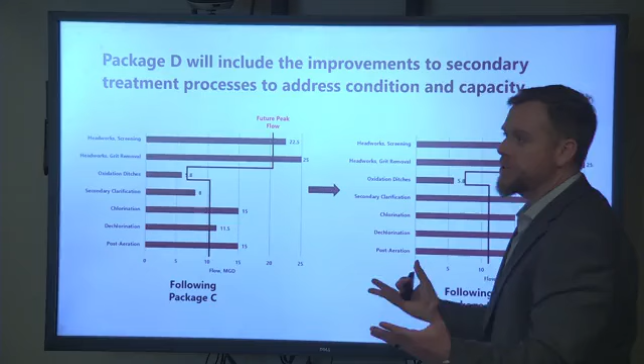And that shows 19. Again, one of the things we'll be able to do as time goes on, as we continue to see the impact of, for instance, improvements to the oxidation ditches, the investment Starkville continues to make in their collection system to reduce I&I—those type of things—we'll be able to really make the right decision. If that's a third clarifier, maybe it doesn't have to be that big; maybe we can provide the right size at that moment in time. But for right now, just applying another unit, for sake of discussion today, that would put you at 19.

And that's the bulk of the cost in this package. Again, a lot of this is pump replacement. There's a small structure to help split the flow better, to get better performance out of our clarifiers. This package is a little over $7 million, and a big piece of that is the clarifiers—rehabbing the existing ones and getting them into a good operable state so they can continue to serve their function at the plant going forward.

Package E, we still have a couple of pumps left that are in the orange. Again, the goal of this is to reduce our risk as best we can. This project tackles the pump building we still have and the influent pump station—not necessarily for the flows we have today. Y'all have a project right now rehabilitating the pump station; this is to address that future capacity line we talked about before.

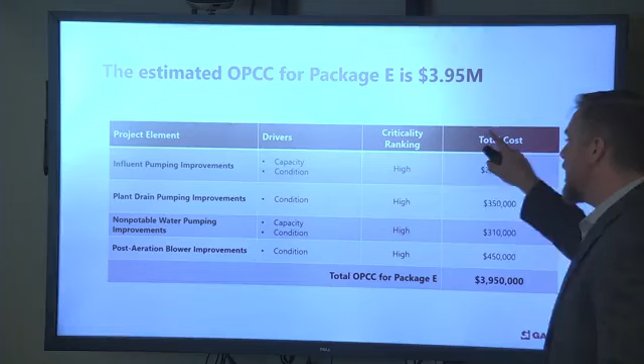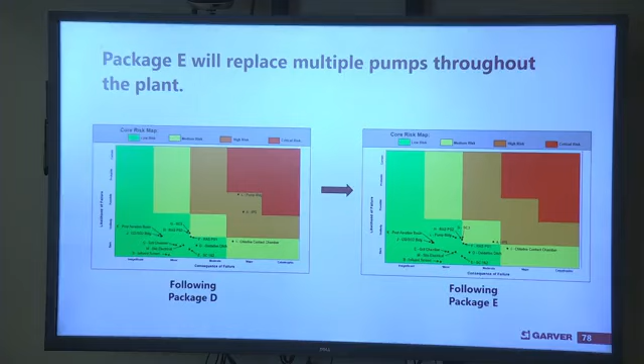I don't have the slide that shows that influent pump station as part of that, but we would effectively, after this project, be pulling all of our assets into the yellow, while a failure of the chlorine contact chamber would be a major thing. The likelihood of that is extremely rare—I think we're comfortable living with that. But in terms of condition of the plant's assets and processes, this really puts us in a good position to rely on that plant going forward and let it continue to support the growth and all the needs of Starkville.

The OPCC for that package is right now just a little under $4 million. You can see where those cost differences are.

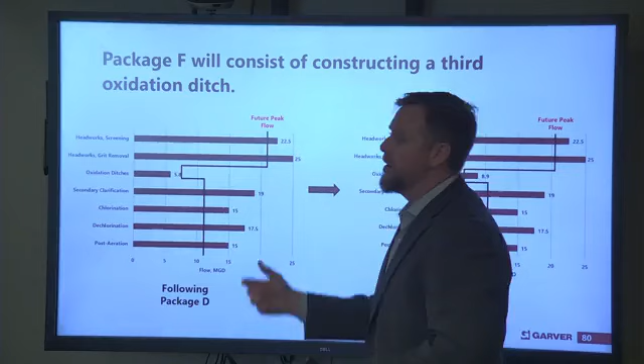The final package, Package F, is simply constructing that third oxidation ditch that Edward was talking about before. This is when we would fill that gap with just a third unit—that would be the focus of this. Following Package F, we're comfortably above our future conditions. The plan is in place, ready for our projected 2044 flows as well as growth the system will continue to see. This is the last piece of the puzzle we put together to come up with the final conclusions. The oxidation ditch is not a small structure, not a small asset, not a small investment—it comes with the largest price tag out of all these packages. But as Edward alluded to, we're talking several years down the line as that need propagates.

Before you do that—yes, ma'am, take a break. You got a question?

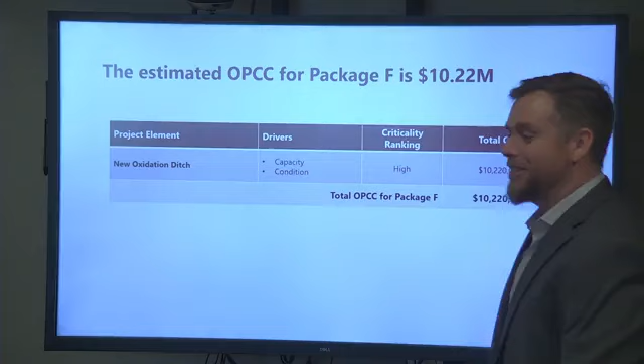Well, it's a crazy world—the past 5 years, for anything infrastructure related, it really makes it a challenge. And even if we did have $35 million lying around, to get all this done in 2 to 3 years we've learned is just impossible. So chipping away at this makes perfect sense, and that's the financially prudent decision. The challenge then is where do you start, right? That was the goal of this effort—to answer that question, or at least make recommendations on where you start, so you're applying your money where it's needed most.

Great presentation. Okay, so a 5-minute break for some pizza, and then we'll get to conclusions. How about that, that work? Yeah, that was that oxidation ditch. All those notes. I don't know what it comes to.

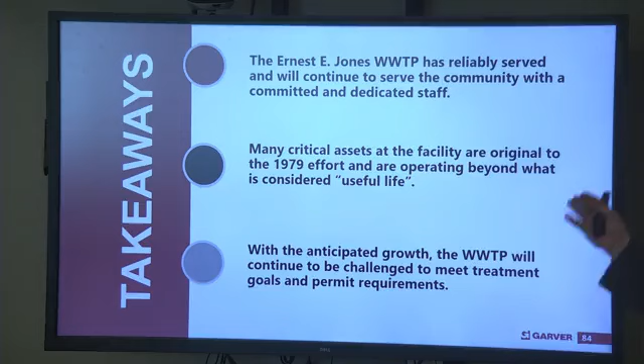Many of the critical assets at the facility are original from 1979. It was a good investment because you got your money's worth over this time. They've operated well, but they're operating beyond what is considered a useful life. That doesn't mean tomorrow they finally hit that retirement age and they're ready to hang it up, but it could. So understand, with age comes the need for preparation—having those spare parts on hand, or understanding if this pump goes down, how quick can that manufacturer get me a replacement.

We mentioned lead times on pieces right now. Motors and electrical gear just would blow your mind. We're talking years potentially in some cases where we're waiting on other projects for large electrical gear. It's shocking every time you ask. But knowing that, making preparation so it doesn't catch you off guard is really the main point there.

With the anticipated growth, the wastewater treatment plant will continue to be challenged to meet treatment goals and permit requirements. I use the term challenge—it doesn't mean it won't. It comes with hard work, and hopefully those big flow events in the middle of summer when it's hot aren't as big of a deal, but it's going to be a challenge to maintain compliance. There's just no other way to say that.

We identified the 6 project packages to allow Starkville to strategically address the condition and capacity of the wastewater treatment plant. Trying to put those together in a way that was financially prudent and reasonable was important. Hopefully that gives you a methodical way to slowly start chipping away, start climbing that mountain, so to speak, of addressing condition and capacity.

We're cognizant of the fact that the city is growing, and y'all have people coming to you probably daily that want to connect to the system. As it relates to economics and the community, you don't want to tell anybody no—we're cognizant of that, and we've had a lot of conversations about how we can still accommodate that, even though there is a gap in that treatment capacity.

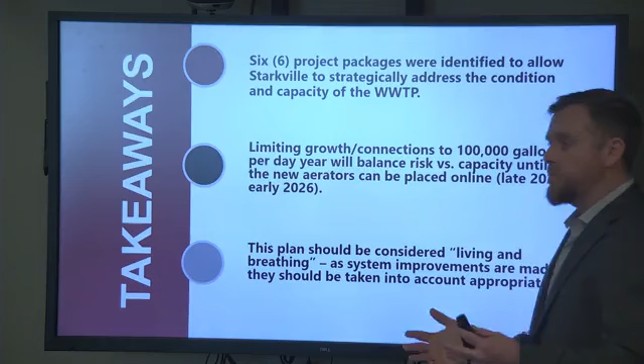That changes—maybe I&I continues to pay dividends and those numbers start driving down. Well, that creates more capacity here. Tom's going to continue to keep close tabs on the loadings and everything that comes to the plant so that maybe he's operating a little bit more efficiently.

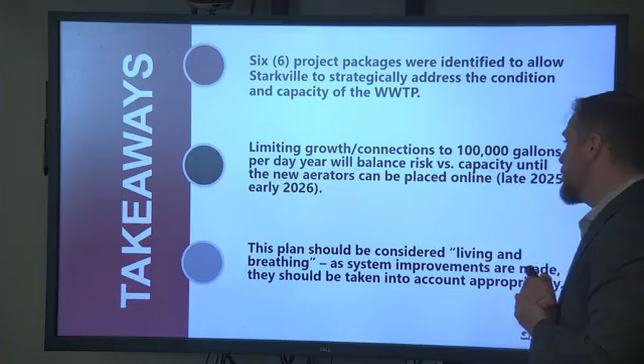Once those aerators come online, the floodgates change, right? That constraint goes away because we address that aerator, and that capacity is over 5 MGD, which is a gap compared to where your historical flows have been. So just know, this was a target for right now, but that's a target we need to update and define as we go through this time period over the next couple of years.

And the final point that ties into that—the term living and breathing plan—this is not intended to be something that goes on the shelf and you blow the dust off every 10 or 15 years. The wastewater plant is continuously changing because the flows are continuously changing. A lot of the conclusions we made are based on a snapshot of time, right? That's a finite period, because we have to draw boundaries.

None of us are fortune tellers and can understand what's going to happen next year. So taking that into account and understanding how that impacts these conclusions and recommendations is important, because it could be a positive impact or a negative impact, but you need to know that—so you're making the right plans, and ultimately putting that piece of the puzzle in place that the plant needs and the community needs. The plant is a key piece of infrastructure. Without our infrastructure, that growth just doesn't exist, or it may exist, but it's going to lead to problems if you don't have the infrastructure to support it.

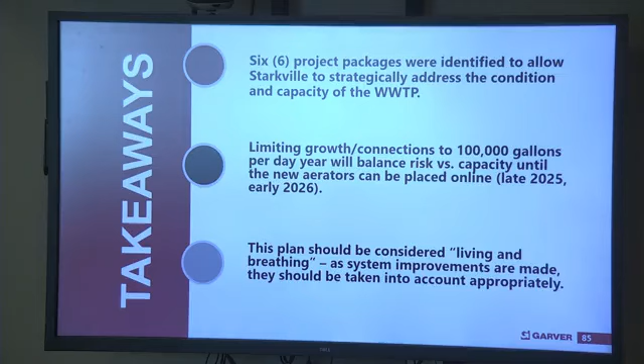So that was it. Those were the six takeaways, but certainly questions, discussion, please.

Okay, so the timeline on that, 2026, or is that being extremely conservative? Because you had talked about delivery.

I would hope late next year we're able to get the equipment installed and get those processes up and going. We just don't know what that lead time is going to be right now on the equipment, because the people that sell you equipment are not the people that actually engineer it. The salesman will tell you whatever number you want. When they get the PO, it goes to a different person, and he or she is the one that actually tells you how long the fab time is and how quick they can procure the parts. That's when they start putting all those estimates together.

I would expect that equipment is probably a 30 to 40 week lead time, potentially, from the day they get the purchase order. So if that's September, that puts the equipment potentially being on site at the end of the summer.

We'll give the contractor a few months to install that. Ideally we want it in the summer because that's when our flows are the lowest, since we're going to have to take some processes offline to get this work done. We want to minimize the impact on the plant as best we can, but when we install those aerators, one of those ditches is going to be down at a time. So it's a lot of things to juggle there. Hopefully in the summer we'd be making progress on getting those online, and then if it's fall.